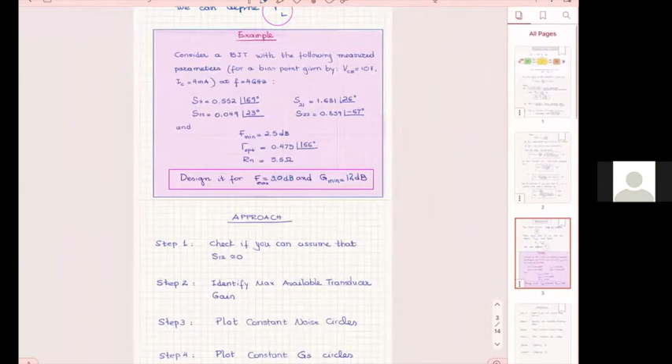We are not going to have an exercise today. I will have a quiz for you on Friday. But today, the other specific questions aside, I wanted to start with a problem that we did last time. I will do a quick review from the beginning. And then what I decided to do is give you some explicit guidance on how you're going to put together the solution of these problems.

At this moment, you need to understand we are at the point where we do true design on an amplifier, because we are trying to optimize between noise, where we try to reduce noise to the minimum, and gain, where we try to increase gain to the maximum. And what we said last time is that the two do not go together. Minimum noise does not mean maximum gain.

As you will see, they are conflicting parameters. So as you try to reduce one, which is noise, the more you try to reduce the noise, the lower your gain. Usually we want minimum noise and maximum gain, but as you try to go low in noise, you go low in gain, and that is not the direction we would like to take. So you always try to find an optimum point. Sometimes you do have guidance on how to define this optimum point, like you will see in this example. Some other times you don't.

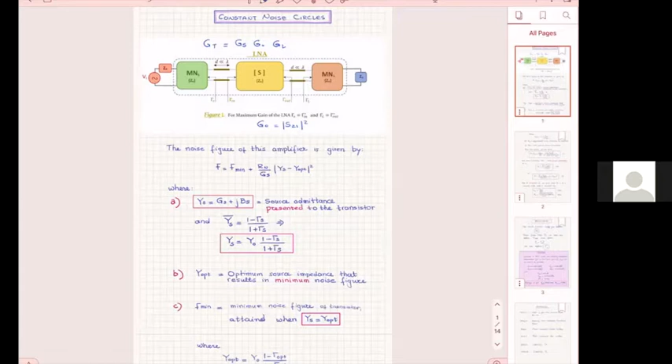From there on, we take it and process it, either we mix it or down convert it, and then you may do more filtering and more amplification. The lower the noise in the signal, the more gain you can put in the amplifier. So these are the fundamentals as we think of the design.

When somebody wants you to design a low noise amplifier, they will come with very specific characteristics for the transistor that the maker has specified. What are those? The minimum gain, minimum noise that can be provided by this transistor, and whether it's going to be provided or not depends a lot on how you design it, but the capability of the transistor to provide that minimum noise is there.

Then they will give you the equivalent noise resistance, and they will give you an optimum admittance, which represents the optimum value of your source admittance to be able to create the lowest possible noise figure. The other thing we mentioned last time is that everything that has to do with noise is on the front part of the amplifier.

Yes, what is your question? Why should it be admittance, not impedance? You can do admittance or impedance, but they are using this form because of the formulas. We go from impedances to admittances. Sometimes you may see formulas with impedances, other times with admittances, however the expressions are given. But you can go from one to another, no problem, whether you are in an equation or on the Smith chart.

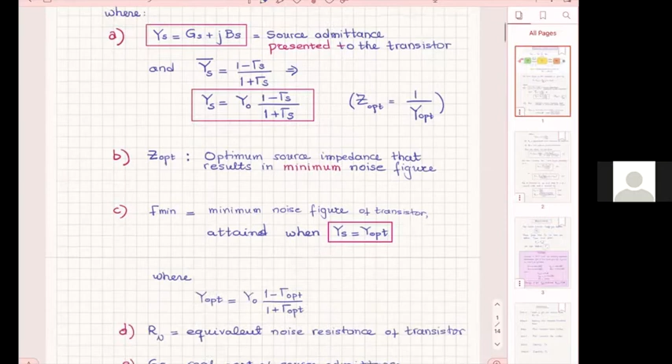So now, this in fact just introduces us to the formulas here.

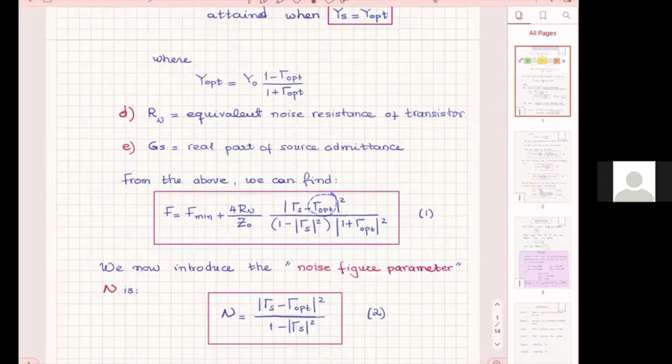So if I had an optimum reflection coefficient on the front end, that implies that my source will have a value that gives me minimum noise. If my gamma sub S, which is here, you remember — I'm not gonna show this all the time, but I want to show it here now. Look where gamma sub S is. When we speak about noise, it's only this part that we are concerned with.

Gain, of course, is everything — this, and this, and that. The product of the three gains gives us the total gain. But when it comes to noise, it's only this part.

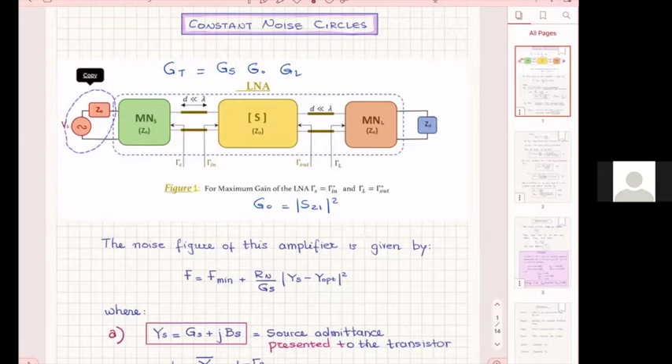So gamma sub S is the reflection coefficient I see when I look towards the source. So I'm here, at this point, and I look towards the source, like this. The source is here. So now, what do I have here in equation 1?

I have an expression for the noise. If this noise is not the minimum, when is this happening? When my gamma S does not have the optimum value. Optimum is when your noise is minimum. And it shows from here, if your gamma S is equal to this optimum, then according to this expression, your F equals F minimum.

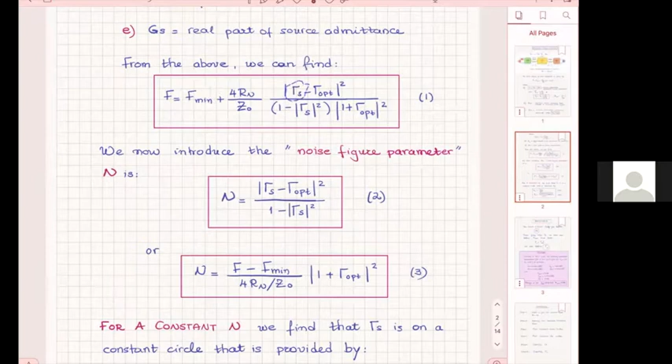And then if your gamma S goes away from this optimum, on the Smith chart you start deviating — you go away from the minimum noise and your noise increases. Expression 1 shows that your noise increases as your gamma S moves away from the optimum. And then from there, we identify these noise parameters.

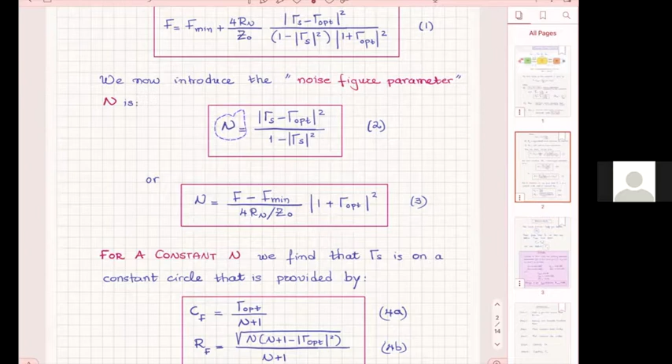A parameter is a way of helping us develop the circles. We define this noise parameter, and on the basis of that we now have two equations, 4A and 4B. These equations are important because they show that all the points gamma S — all the possible reflection coefficient values as you look towards your source — are on the perimeter of a circle, where the center of the circle is C sub F, given by this expression, and the radius of the circle is given by the second expression.

So all of the gamma S values, possible values that give the same noise, are on one circle. Therefore, since there are many different possible noise values you can get, each noise value will give you one circle. And what are these points on the circle? They are the possible gamma S reflection coefficients. Now that's what you keep in mind.

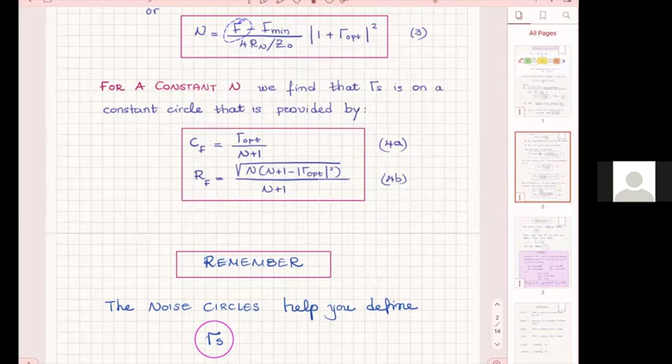This is the whole theory behind the problem. We will try to solve the problem below — I've given you this example we talked about last time, and we're gonna complete it today. Before we go there, I wanted to say: if I do whatever I do, which we're gonna describe right now, and I find my gamma S, then how do I go there to find gamma L? Because I still have to design the output matching network. How to find gamma L?

From the expressions of gamma out, if you remember — and you're going to see them later, because we are repeating them here for you to remember. When we spoke about gain, we spoke about gamma in and gamma out. When we spoke about maximum available gain, we said that gamma in was the complex conjugate of gamma S, and that gamma out was the complex conjugate of gamma L. That was for maximum available gain.

Now, since our gamma S is going to be determined by the noise that we would like to have, how are we going to determine gamma L? From the same expression as we did before. So even if gamma S is determined by the noise, gamma L is still going to be the complex conjugate of gamma out. And for gamma out, there are expressions that give you gamma out in terms of gamma S. So the moment we know gamma S, determined from noise, we know gamma out. And as soon as we know gamma out, we know gamma L from the complex conjugate. Is that clear?

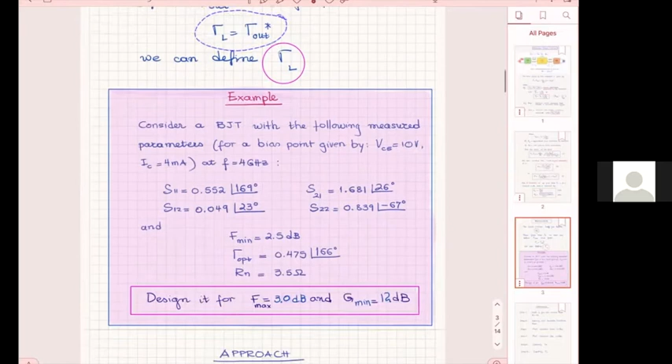Now, here is the problem I'm giving — same as last time. A BJT, somebody measured it, obviously made it and measured it, and they gave us all the characteristics: scattering parameters, F minimum here, gamma optimum here, and the noise resistance there. What they told us is we want to design it so our F does not go above 3 dB — when I say F max, that means I cannot tolerate a noise figure above 3 dB. And G minimum is going to be 12 dB — I cannot tolerate a gain below 12 dB. Do you understand those two together?

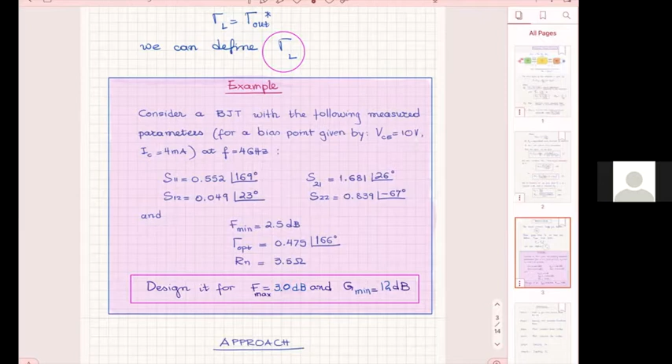Okay, so now how are we going to solve this problem? There are 6 steps you guys have to follow, and I've outlined them here. We'll take one step at a time. This is the process you're not going to change, no matter what, when you try to design.

Step number one: you have to check if this transistor can be considered unilateral. Why? Because when you have a unilateral transistor, the expressions become very simple, so you'd like to simplify your life. You will check if you can assume that S12 is 0, because S12 in a good transistor is always going to be small, but you don't know whether you can ignore it. So you have to test for it.

That's step one. Step number two: after you find S12, you have to understand how much is your maximum available transducer gain. You want to know how high a gain your transistor could inherently give. Why? Because if the minimum value of the gain can be 12 dBs, and the maximum that can be provided by the transistor is 12.5, then I'm in serious trouble. Because if the maximum possible is 12.5, and you're asking me to do 12 dBs, at the same time you're asking me to go only half a dB above the minimum noise...

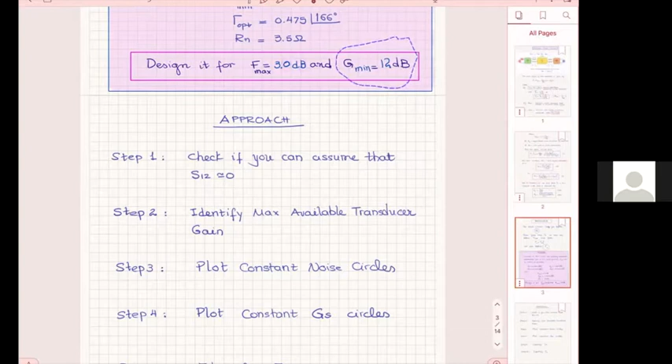Well, that you can figure out without wasting your time. You can go back to the person who asked you to design it and say I cannot do this, before you go and waste your time trying to find how to do it, because it's not going to happen. So you always want to know what your minimum noise is, which here they gave us as 2.5 dBs, but you also want to know your maximum gain from the transistor, which they have not given us here. They may give it to you, but here they haven't, so you have to find it.

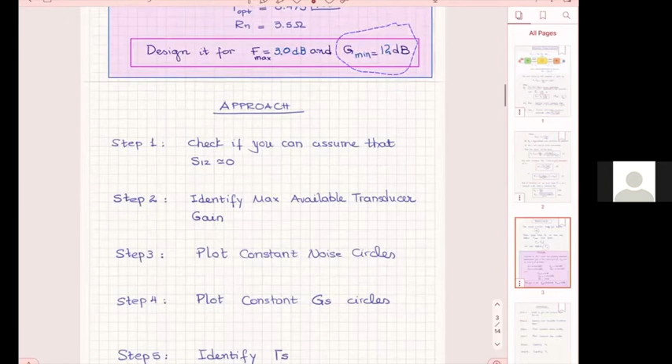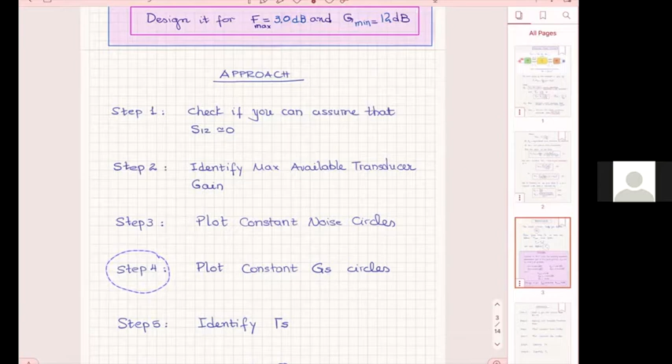That was step two. Step three, after you do 1 and 2, you go and plot the constant noise circles using the expressions we had before. Then you plot them on the Smith chart and keep them there. Then you go and plot the constant GS circles—not the total GT, not the total gain for the amplifier that includes the front, the transistor, and the back end, but only the gain of the front end, which is the matching network. You want to plot those. From those, and how those intersect with the noise circles, we identify the gamma S that we are going to go for. And after we have the gamma S, we identify the gamma L.

These are all of the 6 steps that you will have to follow in any low noise amplifier design. Any questions about that before we start? We'll go through each step one at a time.

Student: If we presume the unilateral case, then we know that gamma L will be S22. So if step 1 holds, can we just define gamma L right after step 1? Instructor: Yes, exactly. And that's what it does when you go unilateral—it simplifies a lot of things.

If you can go unilateral, you simplify a lot of things. If you cannot, however, what are you going to do? You do the best you can, bite the bullet, and move forward with what you can.

Student: If, for whatever reason, I could consider the unilateral case but decide to ignore it, just to see the calculations, would the answer still be correct, since it only serves to simplify calculation? Instructor: Absolutely. Your answer is approximate whenever you ignore S12. But when you check whether you can assume it, you get a sense of how big your error is going to be.

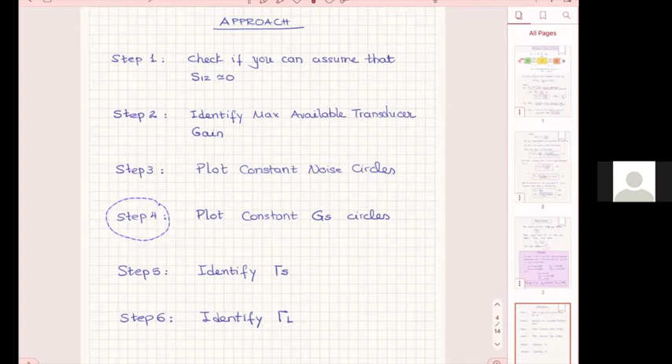It depends, because this is not one directional. Yes, in some ways, if you think a little bit to understand what it means when S12 equals 0, the best way is to go to the signal flow graphs. Let me draw them here.

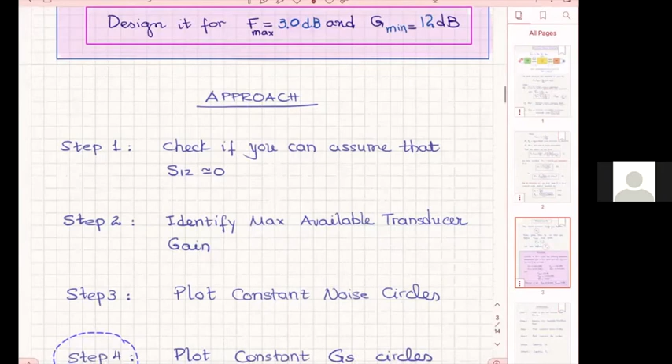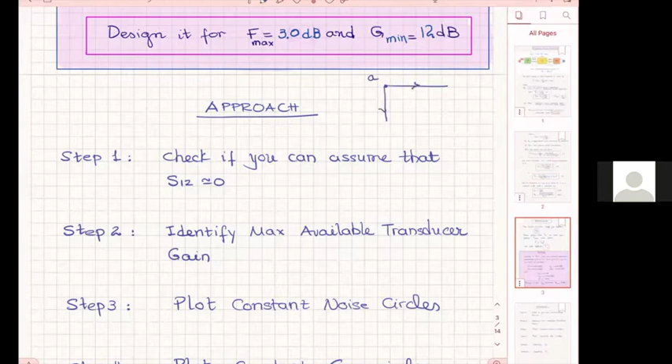So if you have this, this is A, from A this is A1, B1, B2, A2, and so here, wait, so here is S21, S12, this is S22, and S11.

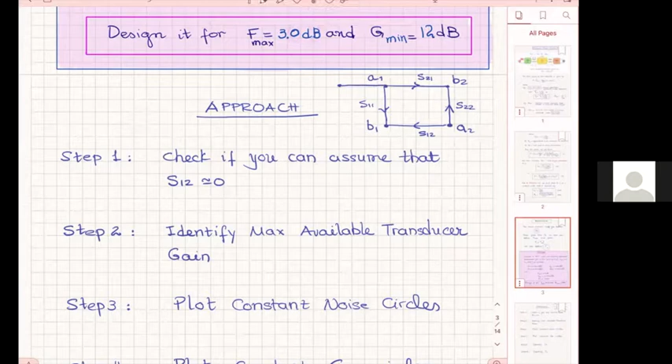Okay, let's assume that we have here, so in some ways you are correct in what you're saying. Let's assume that I have a source that goes here, always the source is going to go to an A point, and let's assume my source is here, BS. Now let's assume that I have a reflection here at the end, gamma L, all right?

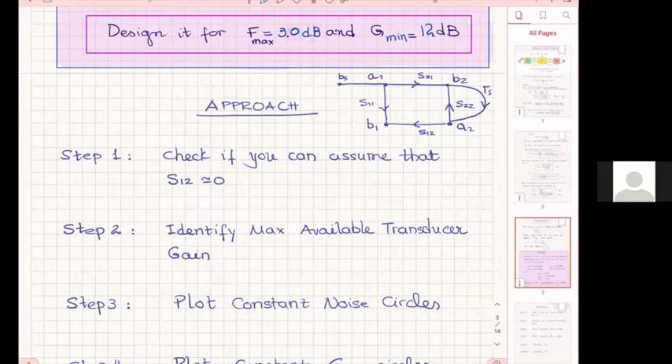What if my S12 is not 0? Then I do have a feedback coming back, you see that, this line. But if my S12 is 0, and I remove this, there is no feedback. Then I don't have any place to go, it does not come back. So in some ways it's correct what you said, even if in reality there may be feedback from all other places that you may have. But this is exactly what it is.

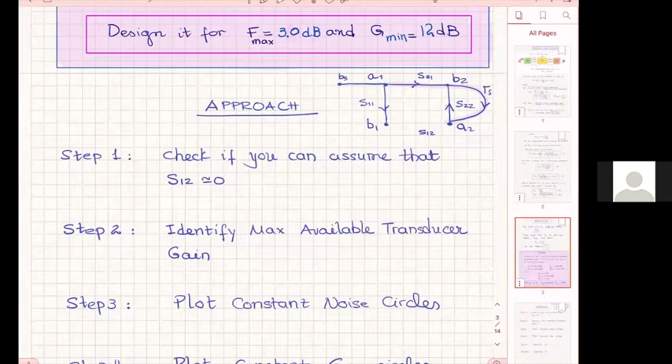I was also thinking, like from other analog classes I remember, with feedback you get better performance in terms of gain and stability.

It depends on what kind of feedback you have. If your feedback is positive, then it throws you out of stability. But if your feedback is negative, then you may improve your gain and everything, depends on what is the phase, how does your feedback come together with your input signal. So it depends on the phase, whether it's positive or negative.

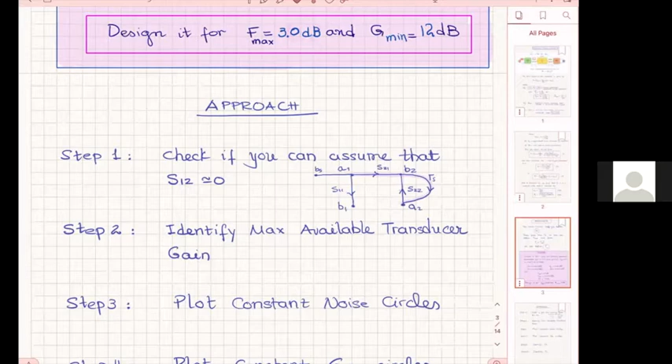Okay, yeah, that makes sense. Okay, so now number one, let us check whether you can assume that the transistor is unilateral.

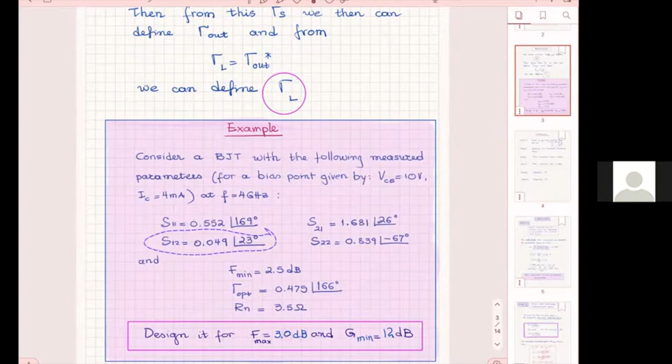For us, S12 was very small, if you remember, it's here. S12, S12 was this one, the magnitude of S12 was 0.049. So the question is, can I consider that to be 0?

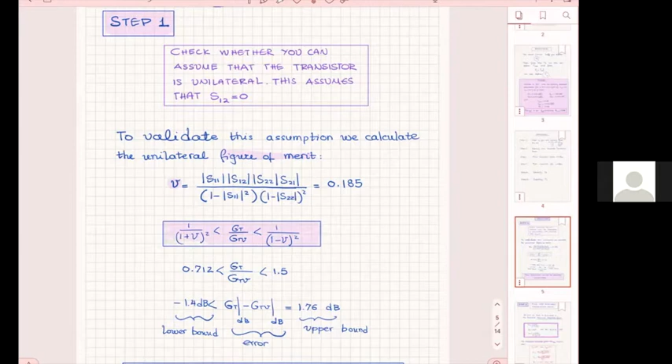And then I put here the correct values that we had into U, and what we found for our case, which is different from the exercise in the book. In the book, if you go to the section where Pozar, the author, does the design, the low noise design using the noise circles, for the specific transistor he's using, you can assume it's unilateral. Because the error you make is less than half a dB. But here, the error you make, if you assume that it's unilateral and it's not, is between 1.76 dBs and minus 1.4 dBs, which is huge, all right?

So in this particular case, and how do we go from this one here down to this one, in case you wonder, is by taking the 10 logarithm, all right? So you take the 10 logarithm of each part of this inequality. This ratio here gives you this difference and is in dBs. And then here is the left part, here is the right part, and it tells you how big of an error you can make. It can be anywhere, so you don't want to make that assumption if your error is so high in dBs. So in our case, unfortunately, we could not assume a unilateral gain for this transistor.

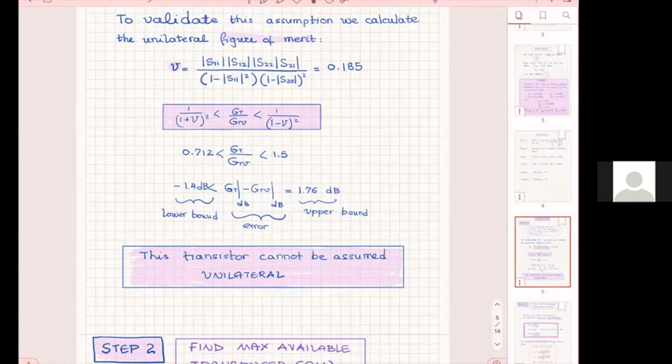You know why is that? Because if we go to 3 dBs, that means that you have already lost half of your gain. So if 3 is half of your gain, then you may have to be very close to, much well below, 1 dB, to assume that your error is not that important. So half a dB, okay.

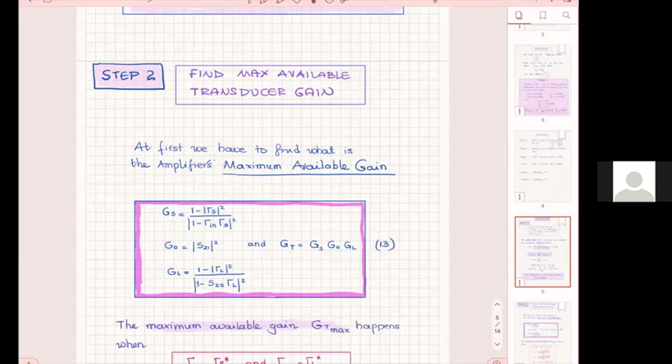Now, so now we found that we cannot use the unilateral assumption, so we'll use all of the full expressions. What is step number 2, we said? Now we have to find how much is the maximum available gain by the transistor. We need to know because they're asking us to do 12 dBs total, and we have no idea how much the transistor could give intrinsically, the highest possible under best conditions. So we need to know that.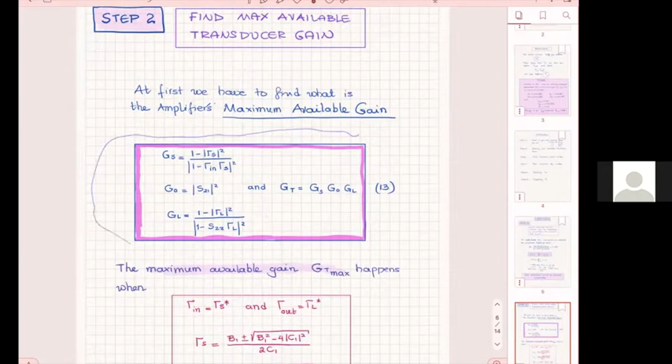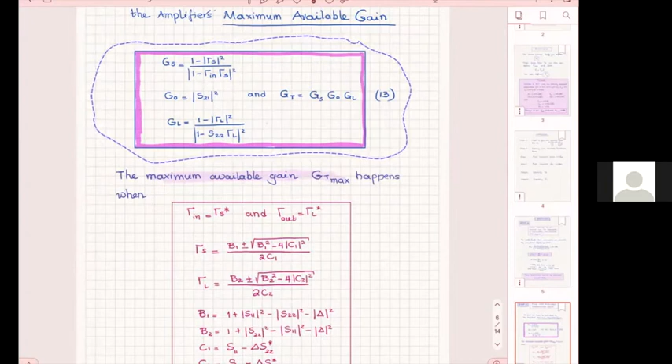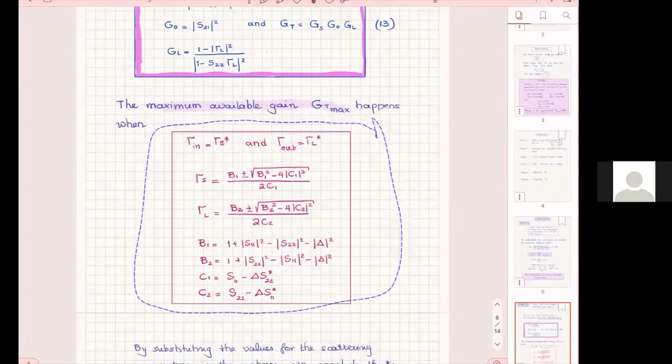So we go back to the expressions you have seen here before, and these are the expressions we are using to find the maximum available gain. What do we do for gamma S and gamma L for maximum available gain? If you want to find your gamma S and gamma L, here you come and find it. You only need to have the scattering parameters. You put all of your scattering parameters there, you plug it in, delta - you know how much your delta is? I don't have it here, but it was previously given to us: it's S11 times S22 minus S12 times S21. That's what it is, and it's in our previous notes. I don't have it here.

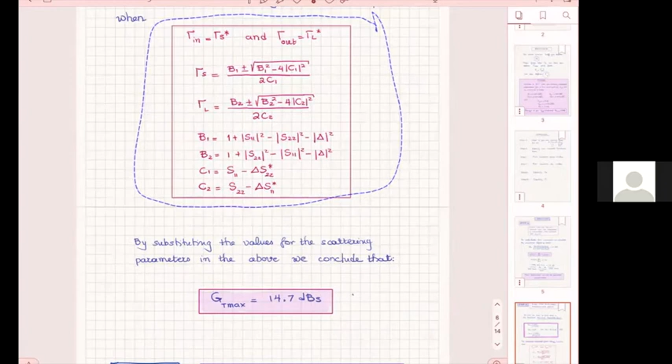So if you plug in there, what you find is for this particular set of scattering parameters, the maximum gain your transistor can give is 14.7 dBs. So that tells me that the fact that they're asking me to go close to the noise figure, so instead of 2.5, which is the minimum I can get, they're asking me to possibly go as high as 3 instead of 2.5. But I have enough to compromise in my gain. So that makes me believe that I can do this design.

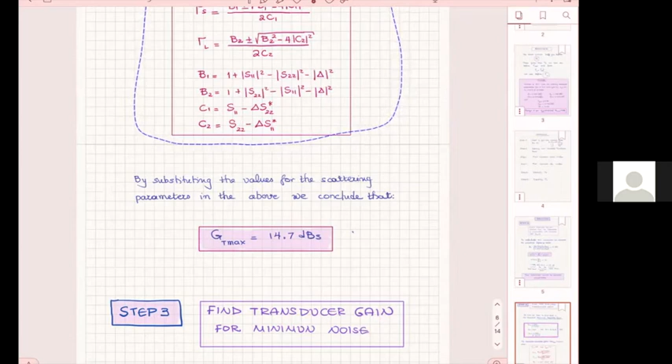But if my maximum gain had been like 12.5, then I would stop here and go back to whoever had asked me and say, you know what, this is not going to work. So before I go and show it to you that it's not going to work, I don't want to do this extra work - I'm telling you it's not going to work. But now, since I have 2.7 dBs difference between the maximum and what I have to do, I know it's going to work. Any questions so far?

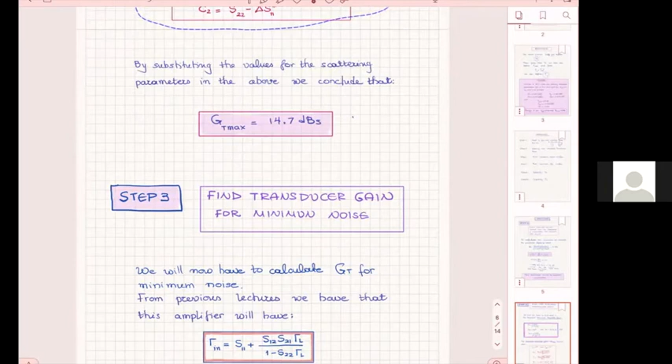Okay. Now, there is another parameter that I would like to have, which is also useful. And what I would like to know, since I found the maximum gain that the amplifier can give, I would like to show how much is the transducer gain when I have the minimum noise. So practically I define a spectrum of values for G.

So I find the maximum that I could go and what I would get for minimum noise. So I know where I am, all right? So I know that I have to be below 14.7. I know that they asked me to be at 12, but how does 12 compare to the gain that I would get if I were to get minimum noise? What if, for example, I'm so lucky that for minimum noise, I can get something close to 12? That will be interesting because I could overdo my specifications practically.

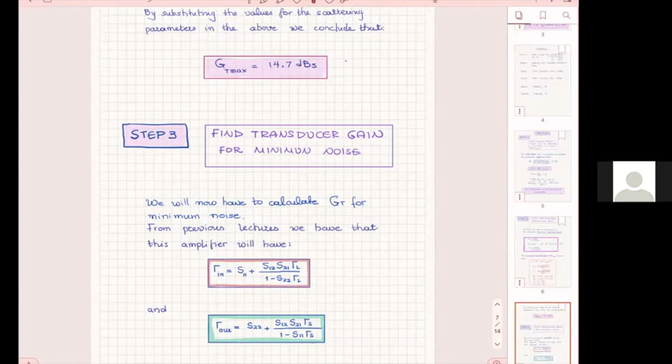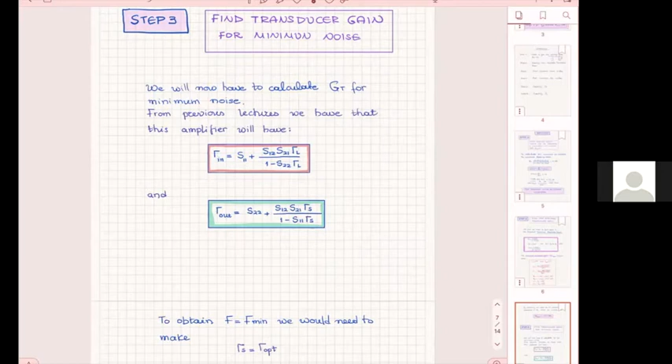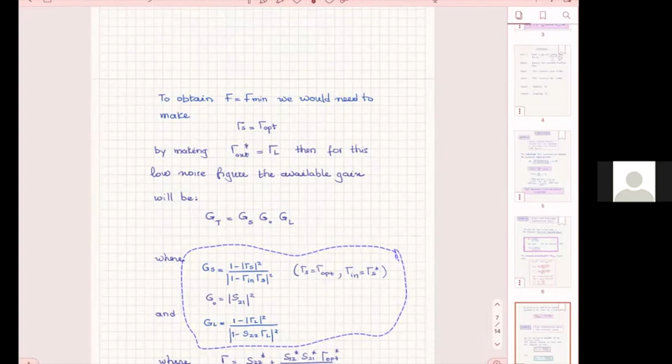Okay, so now I have to find that, and what I do here is to be able to find the GT for minimum noise. We find gamma in and gamma out. For minimum noise, what do we do? We set our gamma S to be gamma optimum - remember we said that? And from here, I can find gamma out directly. And from this and the expressions here, I can find G sub S, which is the gain of the input matching network, and that is under minimum noise. Of course, G naught, which is S21 magnitude squared all the time, and then G sub L.

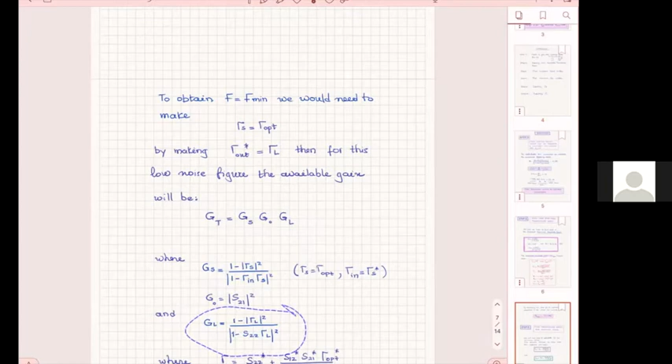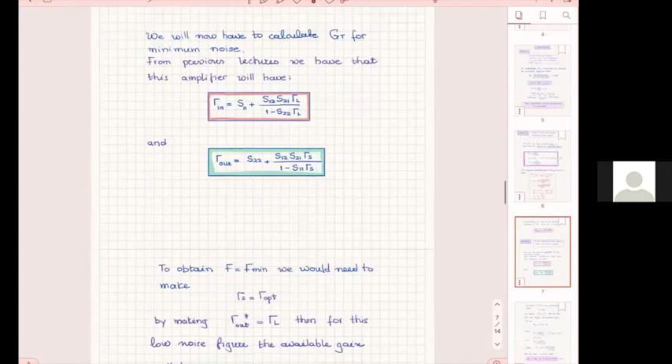And if I find all of these, then what I calculate here now is that my gain would go to 11 dBs if I were to do a minimum noise of 2.5 dBs. Now that tells me, so far, that I have a viable solution to the problem. So all of these steps 1 to 3 are to confirm that I have a viable solution to the problem, because at 2.5 dBs, so if I were to write it here for you...

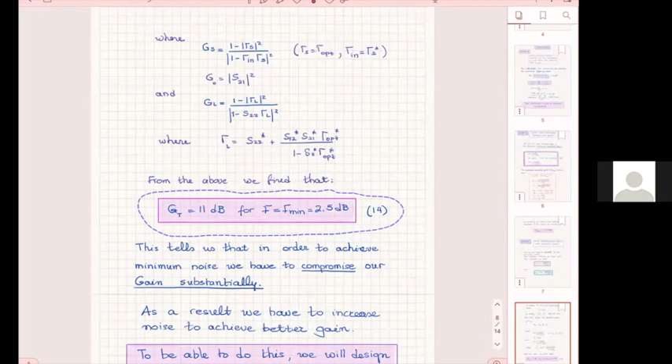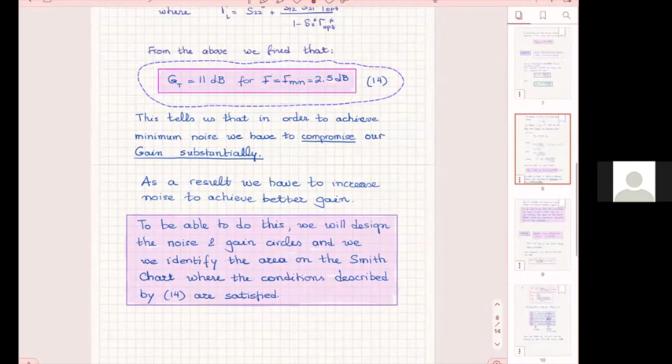Let me add a page here, where I am. Okay, step here, I will add a page here. So practically, I have found that if this is a line - it's not a line exactly - and if here I have F and here I have G, okay? If this is F min, then my F here at F min is 2.5 dBs, then my GT is 11 dBs. And then on the other end, I have GT max, which is 14.7 dBs, and obviously I have an F which is much higher than 2.5 dBs.

I don't have to find that, but I know they've asked me to be here. One second, let me finish and then you ask me. They are asking me to not exceed this F value, which is 3 dBs. They ask me not to exceed this one, and they ask me to not have anything below 12 dB. So practically I have to find a place.

I have to find a place where I can do this and be below 3 dBs. Yes, now you can ask me. You said it's 14.7, right? Yeah, okay, 14.7, I forgot. Thank you.

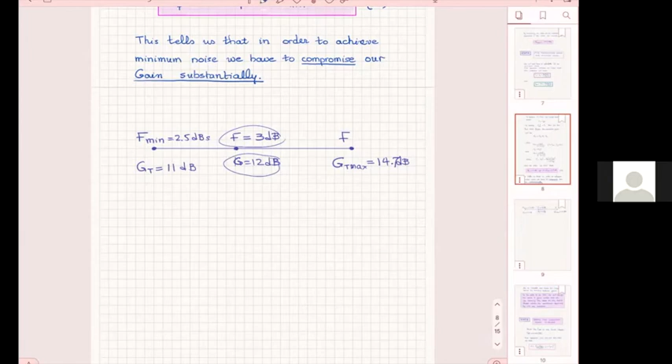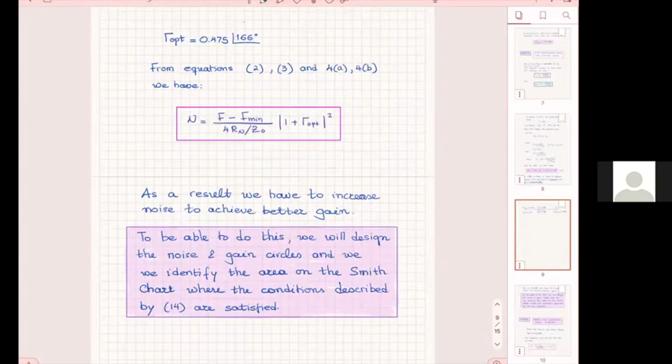And now I proceed with... I continue with the solutions, and what I would like to do is draw the constant noise circles. Okay, so now I'm doing the work. I'm going to go and do all of the constant noise circles, and then I will put an overlay on them with the constant gain circles and see what I get.

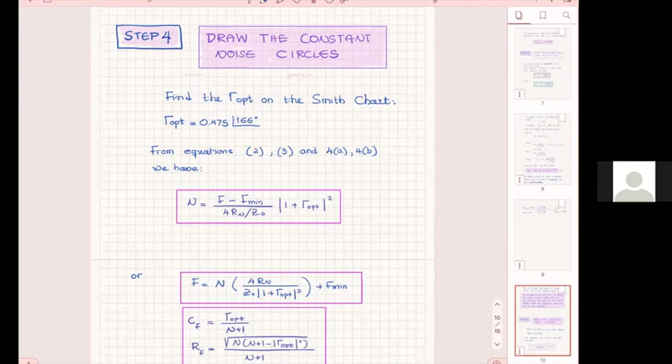Okay, now I have to develop the constant noise circles. I go to these formulas and create a small table. I suggest you always do this table so you don't get confused. Each one of these columns is a circle, practically, all right?

Because here, for n equals 0, practically I don't have a circle, I only have a point, as you can see, because the radius of the circle is 0. So I have a point, and this point gives me exactly the minimum noise figure, which is 2.5 dB, but in real value is 1.77.

Okay, then I increase n, and I increase n in a modest way because the value of n, the noise figure, the center, the position of the center of the circle, and the radius are very sensitive to this n value. So I cannot go n equals 2 or 3 because it throws me totally out of the space where I am.

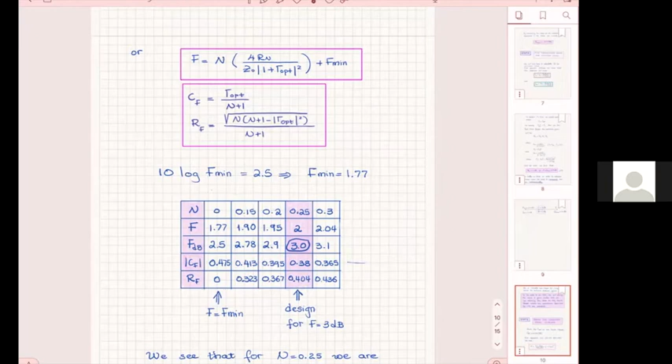But I go from n equals 0, which is like one point, the point of minimum noise, to n equals 0.15, 0.2, 0.25, and then I can find the centers here, the position of the centers at this level, and then the radius. Okay, so now I do that.

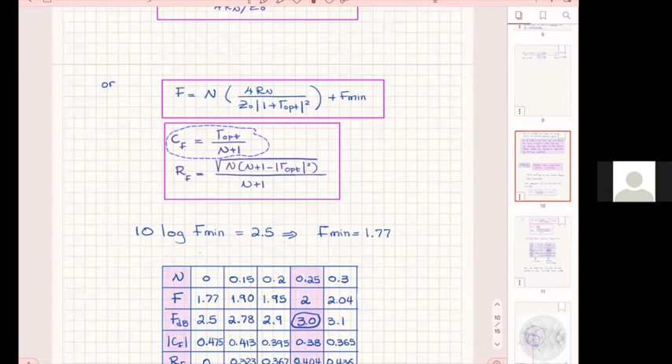Okay, this line here gives us, in fact, exactly the line on which all the centers of the noise circles will be. And why is that? Because if you remember the formula, look at this one. All of these centers will have the same phase as gamma optimal. That has been given to us by the designer of the transistor. So we know the phase of gamma optimum, and all of the points have the same phase for gamma, for reflection, they are on the line.

You remember what we said last time? You go along this here. You come here and it's 166 degrees. So this blue line that I showed you has all of the points, and this point here...

Where was that on? This point is the gamma optimum, which in fact, I will write it again. Okay, so that point by itself is not a circle, it's just a point, and it shows where the gamma optimum is.

Then I change the values of n, as you can see here, going to 0.15, 0.2, and 0.25. And then you see I selected the one that gave me—it just happened—something very close to 3 dB. So instead of putting all of the other circles in place, I selected the one that gives me 3 dBs. Then I know if I draw the 3 dB circle, which is here, every point inside that circle is less than 3 dBs. Is that clear?

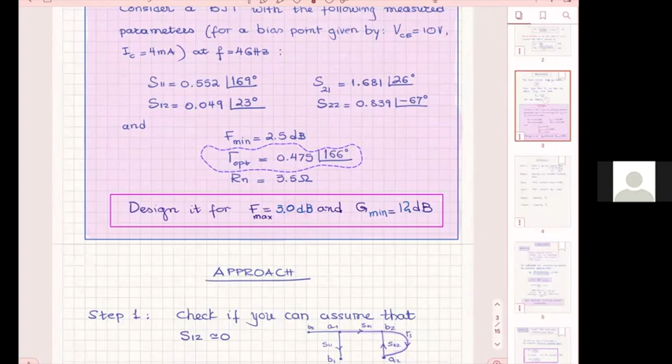Okay, so I go and plot it on the Smith chart. How do we plot a reflection coefficient on the Smith chart? We go here, remember we said you come to the second bottom row, the magnitude, and you measure and place it, then you draw a circle. But gamma optimum does not have a circle.

Okay, so now you could do more circles, if somehow I did not have, who knows, depending on the problem. But you have to create my advice: create that little table first, because then you know how many circles to put. Don't just get the values and draw a circle. It's going to be so busy that you won't be able to know what it means.

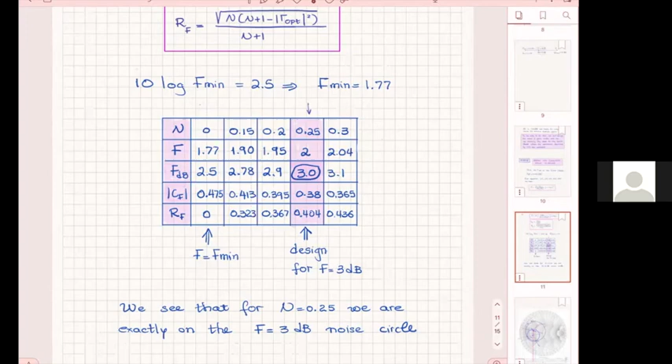So draw the table first. You will do that both for the noise circles and the gain circles. You do the table, then you plot the circles you want, and you plot usually the circle closest to the value you have to design for. Okay, so I got that.

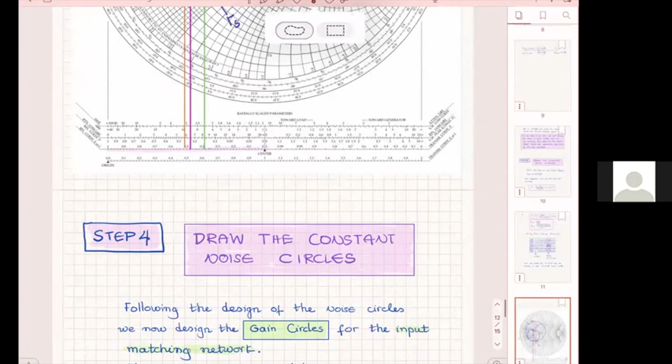We were lucky with this. Now next step, draw the constant gain circles. Okay, and I do that so I can attract your attention because the notes are very long and you may miss something. So we draw these circles, and for the gain circles, we have these formulas.

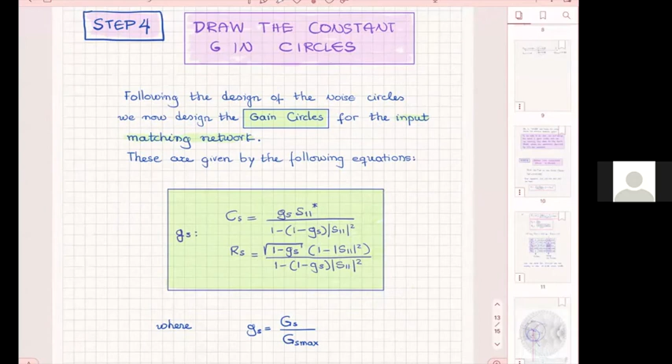Remember, we found this coefficient G sub S, this value, this parameter, which in fact is the ratio between the G sub S, the value G sub S. So every value of lower g sub s shows us a ratio of capital GS over GS max. What is the capital GS? It's the gain of the input matching network and how that compares to its maximum value. Okay, so it's a parameter that we are using.

We are using this parameter, and when the parameter has value 1, what does that mean? That we get the maximum value for the input matching network. What happens if we get the maximum value of the input matching network? That implies we can get the maximum gain for the whole amplifier. Do you agree?

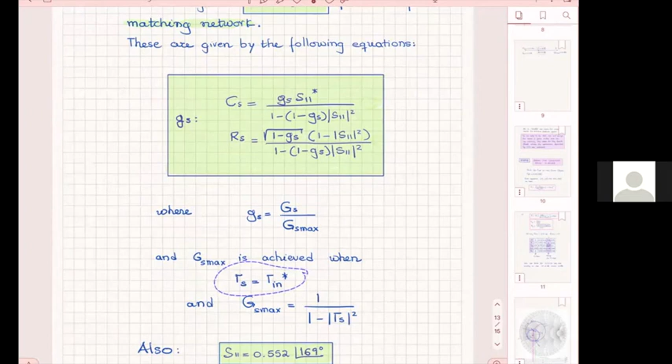Yes, because the G sub S becomes equal to GS max under these conditions, which implies we are going to have conjugate matching on the front, and we always have conjugate matching at the back. One conjugate matching in the front and one at the back gives us total maximum gain for the whole amplifier. So GS equal to 1 means total maximum gain for everything, but GS less than 1 means, of course, less than the maximum gain.

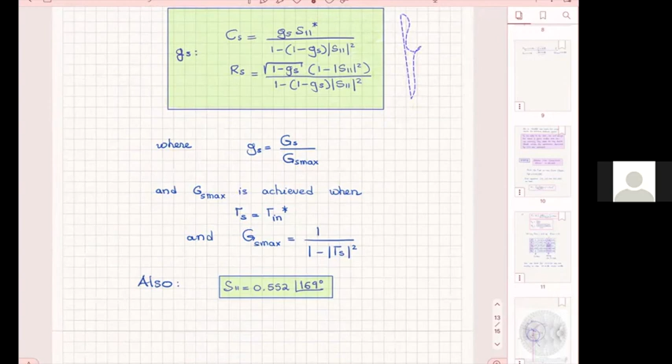So all of these circles on the front, for different values of GS less than 1, will show different circles. And then I did another similar table where I changed the GS values from 1, which shows that it's not a circle because the radius now is 0, so it's a point. So when lower case g sub S equals 1, your circle for the constant gain becomes a point with 0 radius, and that corresponds to the maximum G sub S on the front end.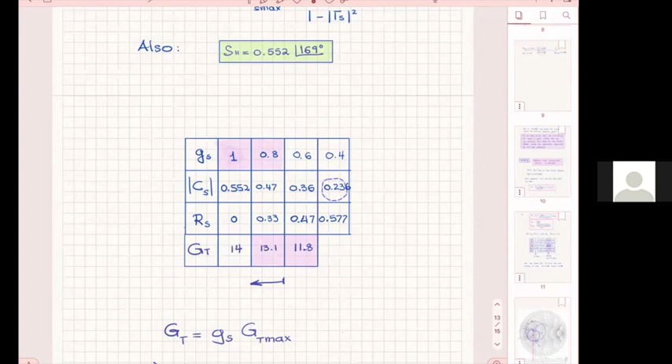Okay, and then every other value will give us something different. For every different value of G sub S, I do the same little table and find the centers. Now, what do I know about the centers?

From here, if you look, what is the phase, it's in a polar form obviously. What is the phase of C sub S as a point on the Smith chart? How am I going to find where this point is? It's going to be on a line that corresponds to the S11, opposite, negative phase. In terms of phase, the phase of S11 complex conjugate is negative of the phase of S11.

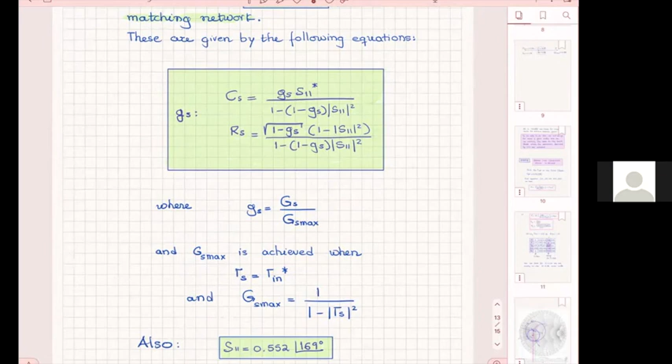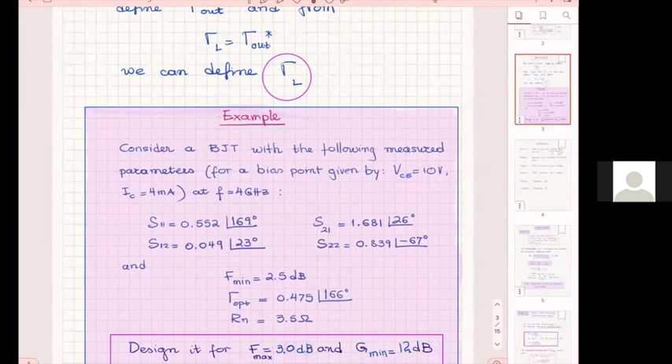Your audio just cut out.